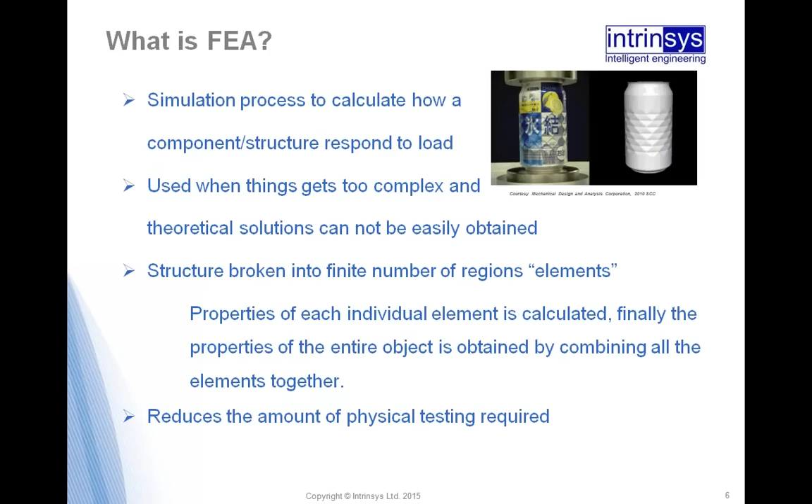So really the major application is that it allows you to reduce the amount of physical testing. It doesn't mean that you cut physical testing 100%. It always comes as a complement and allows you to reduce the amount of it, because it's always good to use physical testing to validate FEA.

In terms of what it gets used for, almost any engineering application finds application for FEA, whether it's transportation, mobility, aerospace, marine, industrial equipment, high-tech, consumer, life sciences, which is really a very interesting application which has come up quite a lot in the last few years. We find that a lot of high technology these days is being developed to look at life sciences. There's so much application for modeling, for example, human parts. There's a lot of development in being able to model human tissue materials and so on. So that's quite interesting, and the future is quite bright in there. Energy applications, architecture engineering, and many, many other applications.

What can it tell me, or what can it tell people? It usually answers many questions. A typical question: how can I improve my design? Will my product leak? Will it break if I drop it from certain heights? How long will my product last? How will it perform if it's used off-spec? All these questions can be answered easily by FEA. How can I make my product lighter? Is my product safe? Will my product pass or require certification testing? If I make my product from cheaper material, will it still work?

Okay. So just so we can summarize what sort of advantage FEA can offer us, it's cost effective. As you can imagine, physical testing is getting very expensive, especially if you have to do many different iterations. So there's no need to create the real thing and destroy stuff and so on. Time saving. Again, once you've created a simulation, you'll be able to change the parameters very easily without having to go to the factory and redo prototypes and stuff like that. So a lot of time saving in it.

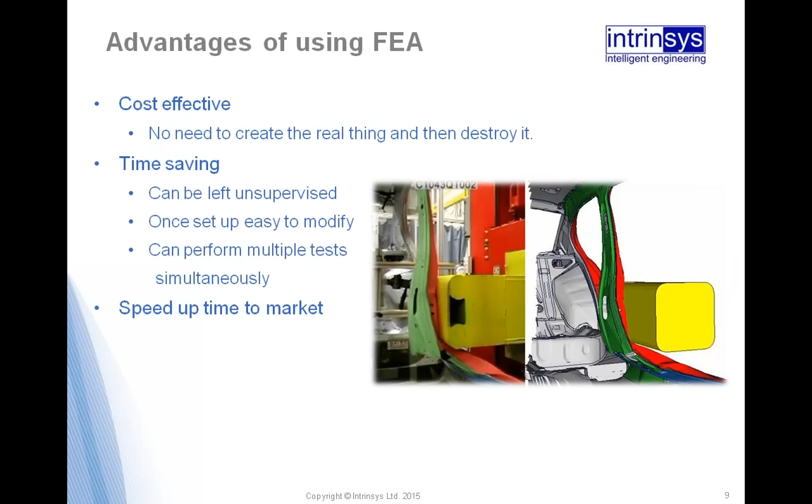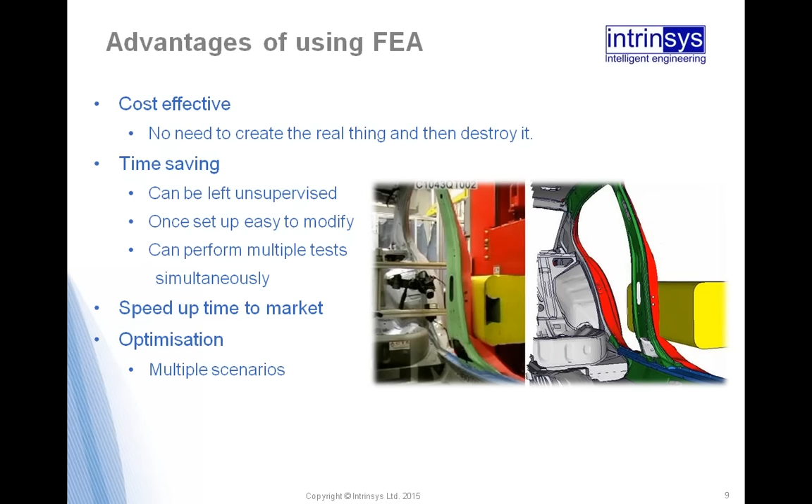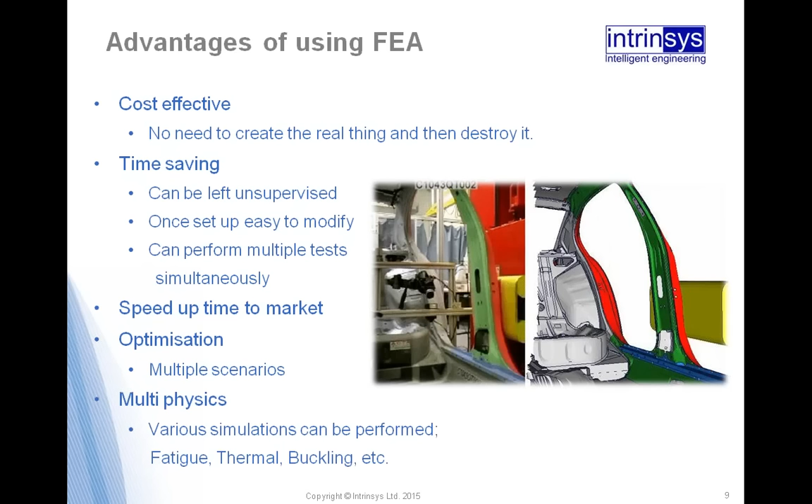Speed up time to market. So again, once you've done that, you'll be able to get the product to the market quicker. Optimization, very easily done by changing parameters within the simulation process. Then you can get the answer quicker. Multiphysics: if you're doing advanced analysis, you'll be able to couple different types of analysis behaviors, such as thermal and stress, or thermal and CFD, and so on, fatigue analysis, all that kind of things that you could do with multiphysics.

So in terms of what is so special about CATIA for FEA analysis, the strongest part basically is that it's integrated with CATIA. You find this is really, really useful, because it's using the same user interface that you used for the design environment, okay? And all the analysis specifications are associated with the design. So any changes get maintained in there. You don't need to come out of the software. And basically, you can properly size the design, add material only when you need it.

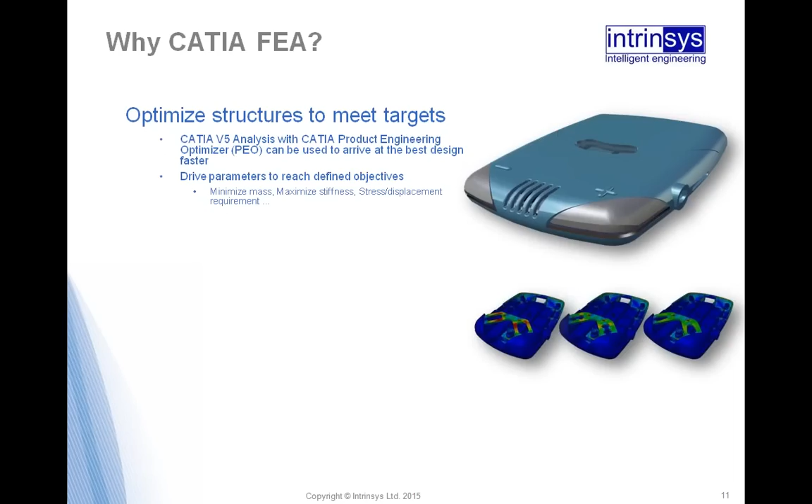If you want to compare design alternatives, for example, if you have a number of parameters that you'd like to test, rather than go to the factory and create prototypes, you can actually parameterize your model, such as geometry parameters, whether it's length or diameter or width and so on, or material properties that you'd like to change in order to get the best one, or change the mesh parameters or loading parameters. All these things can be parameterized. You can also optimize the structure using the product engineering optimizer. With this one, you'll be able, for example, to minimize mass or maximize stiffness, or control how stress and displacement behave.

This is a very interesting one, which is basically the workflow for designers. It allows you to use templates. And these templates can be customized by, for example, senior designers for junior designers to be used later on. So they could create templates to control mesh properties, or connections or load constraints, or even reports. When you generate reports, you could set up certain templates to generate reports, and in the future the junior designer just comes and uses these templates for his project.

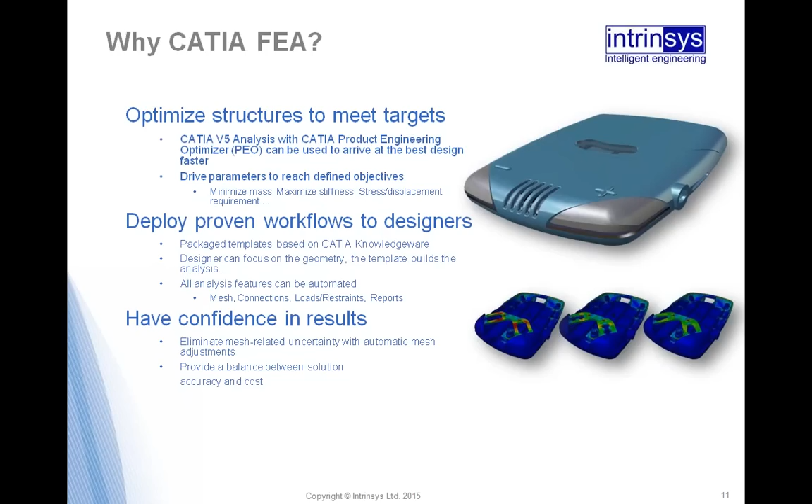And the final one, basically, is to get confidence in the results. Because there are so many automated tools, such as automating the mesh, it allows you to get the software to do all the hard work in order to work out, for example, the best balance between solution accuracy and cost.

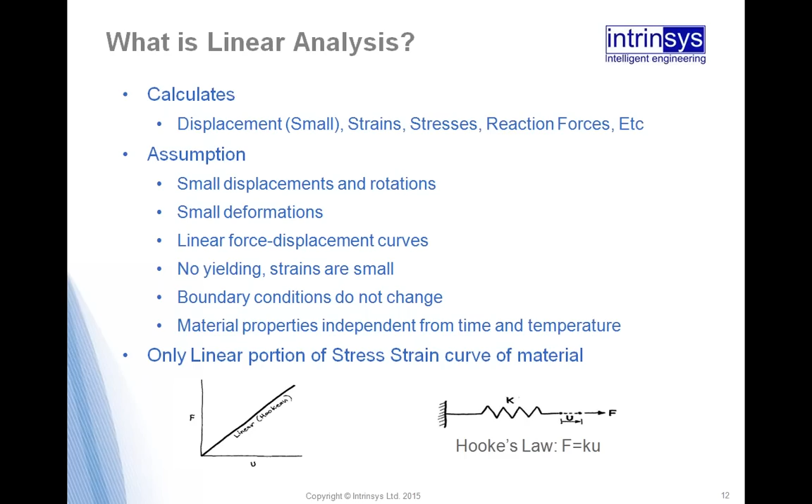The other thing is we basically assume that the material deforms linearly, so the relationship between the stress and the strain is proportional. Therefore, a linear analysis displays a stress value. If a linear analysis displays a stress value beyond the material's yield stress, we generally assume that yielding would have occurred and that the deformation at this point would be inaccurate. So you can see it's also heavily associated with Hooke's law.

So analysis tools for linear analysis - what solutions are there for CATIA V5 users? We're going to keep coming back to this diagram. You can see along the top we've basically got designer, design engineer, and analysis expert. We're going to start off by just focusing on the designer part of this diagram, which is just the CATIA V5 analysis tool. So we're looking at the designer being able to perform linear static analysis and mode-based dynamic analysis.

We're not saying that analysis experts wouldn't be performing these analyses, it would just be the designer. We're just saying the designer wouldn't be creating something like a transient dynamic load analysis, etc. They'll be sticking to linear static analysis that they can perform, and again, this can be done using CATIA V5.

So in CATIA V5 linear analysis, it can be performed using parts and assembly analysis. Whether you have a part or an assembly, you can create a linear static analysis of it inside CATIA V5. Within CATIA V5, you need the GPS module to create a part structural analysis and a GAS module to create an assembly structural analysis, but these are all part of a GAE configuration.

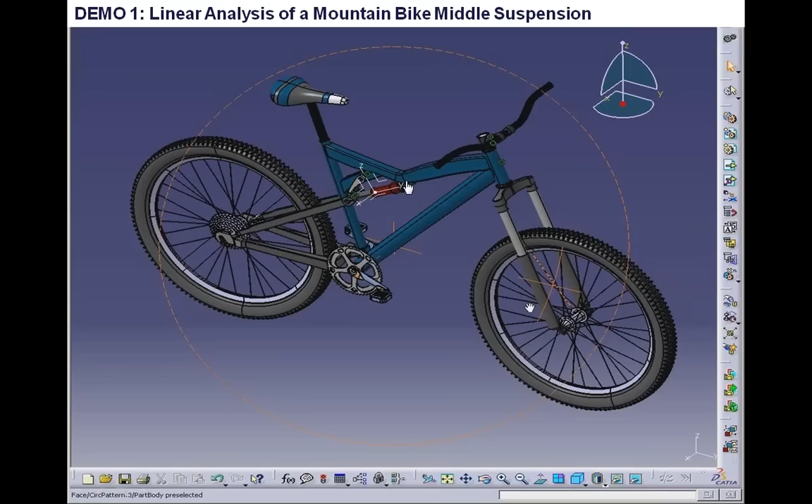The components we're actually analysing are the frame, the shock absorber, and the bracket which attaches the rear of the shock absorber to the frame. We're interested in the join from the top part of the shock absorber to the frame. That bracket would have been welded onto the frame itself, so we're trying to analyse that.

So I've just talked you through this analysis. As you can see, it's just a mountain bike.

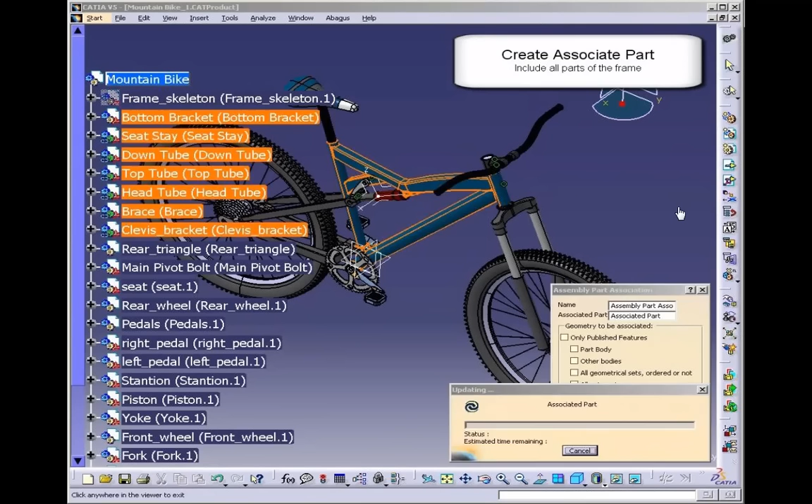We've got an assembly, and the first thing we're going to do is the frame itself, which is made up of multiple parts - each part of the frame in this assembly is an individual part. But just to make it simple in our analysis, we're going to create an associative assembly part, so each item in the frame is seen as one part. Rather than have the top part of the frame, the left part, the right part, etc., we're just creating the frame as one part. So again, you can see the associated part.

Now what we'll do is assemble it all into one part body. This is a must in CATIA - it all has to be under a part body. So we've just created a Boolean operation.

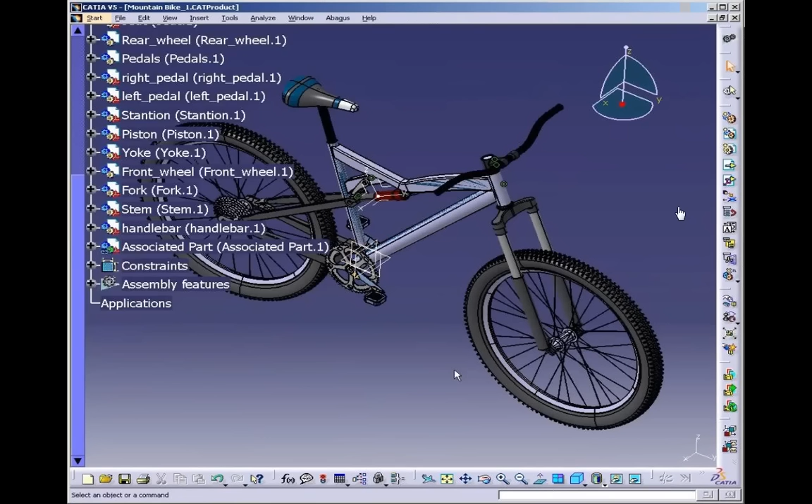And then we're now going to apply a material. We can apply a material at the part level or within the assembly, but in this instance, if we create the material to the part at the part level, that will automatically be ported over into the analysis when we move into it. The next thing we want to do is hide components of the mountain bike that we're not interested in.

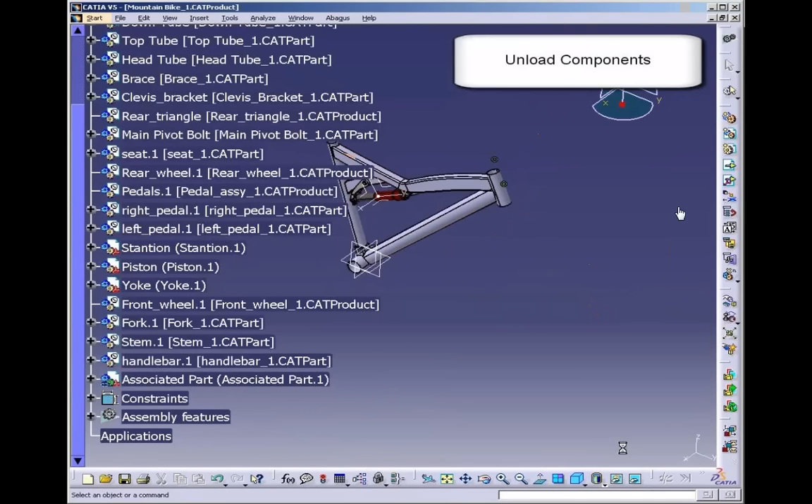There's no point overcrowding your analysis, making it longer to set up and longer to compute. You basically just want to eliminate anything that doesn't need to be in your analysis, or that you could use something called virtual parts to replicate. So these are the four components I'm basically interested in for the analysis.

So I'll just move into the analysis workbench and create the analysis. Once it's let me into the workbench, there we go - I'm going to create a static analysis, a linear analysis, and you can see it's automatically created my mesh.

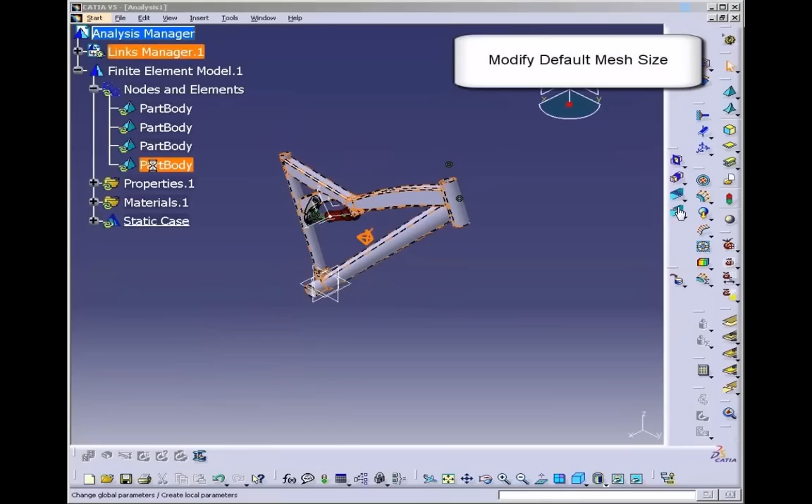So there's four meshes because there's four individual parts, and I can just modify the mesh size by double clicking on the meshes.

Okay, then I can restrain my model. I'm restraining the frame, so towards the front of the frame where the handlebars would go, and the rear of the frame where the seat post would go. In this instance, I'm creating sliding constraints.

And then because we have four parts, even though we've got four meshes, CATIA doesn't really know how they interact with one another, or that they interact at all. So we need to tell CATIA that they're actually connected - this is what we're doing now, creating connections between parts.

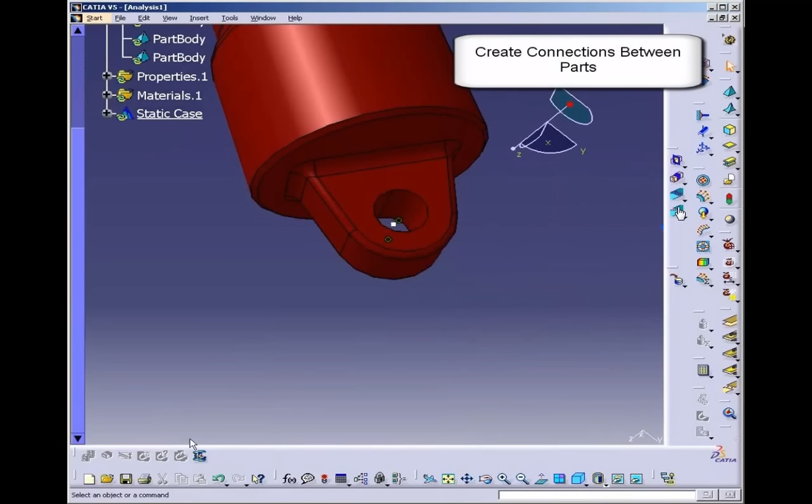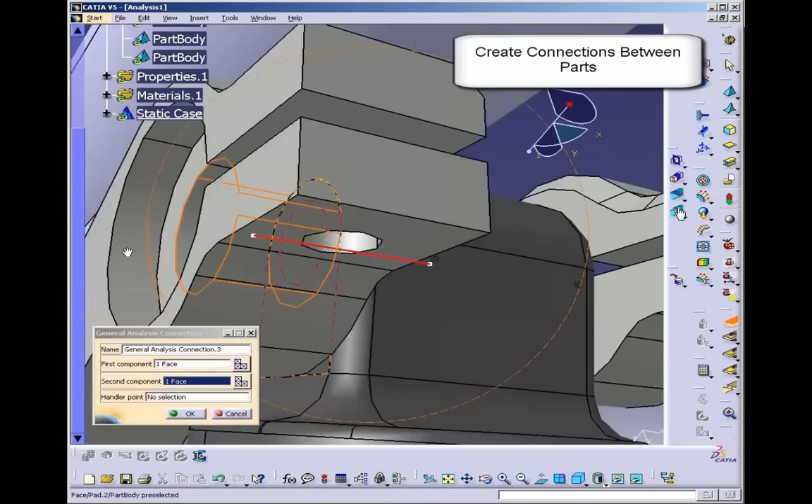So by picking the appropriate topology, in this case between the bracket we want to analyze and the top part of the shock, we create a connection. Another connection is between the second bracket and the frame. You have to take care when selecting the right topology. Then we have the lower part of the shock and the bottom part of the bracket. And finally, the fourth connection is between the top part of the shock and the bottom part of the shock. So there we go.

So now we've told CATIA everything's basically connected, but we haven't actually told it how it's connected. We've said there's a connection, but we haven't got round to telling it what type of connection it is. So this is where we basically create a connection property.

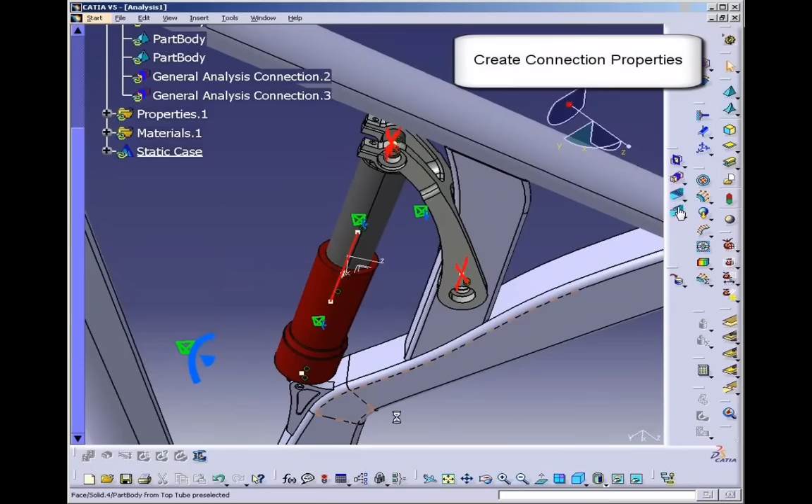So all I'm doing is saying at the pivot points that there's a rigid connection, but it's allowed to rotate about its own axis. That's what I'm doing in the three instances - there we go, so I'm allowing rotations.

And then on the final one, I'm basically creating a fastened spring connection. I'm allowing it to translate, so dampen along its own axis, but making it infinitely stiff in the other directions so it can't translate in those directions - so it's basically acting as a damper would, translating along its own axis.

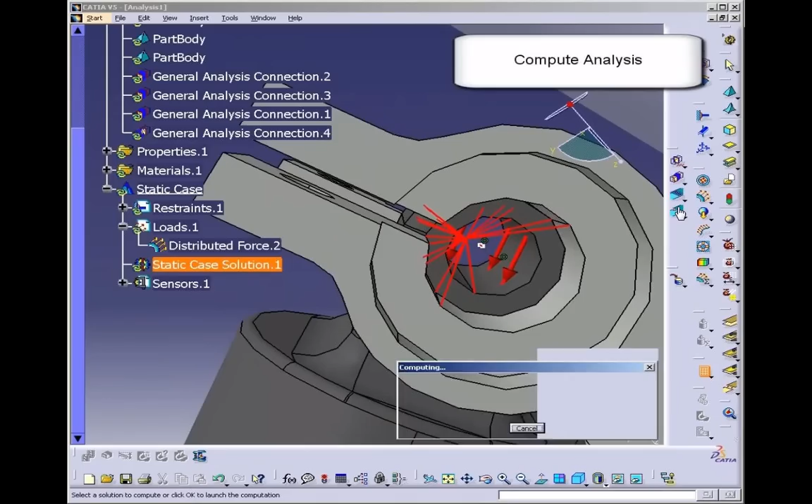The next thing I'm going to do is simulate a force as if there's basically an impact on the rear wheel and the shock's absorbing the impact. So I've just applied a force on the bottom end of the shock. Now I've basically got all my mesh, my properties, my materials from the parts itself, and my loads and restraints, etc. So I'm ready to compute - I'm computing my analysis now.

The linear analysis is fairly quick, so it won't take that long to compute. There we go. So there's my analysis results.

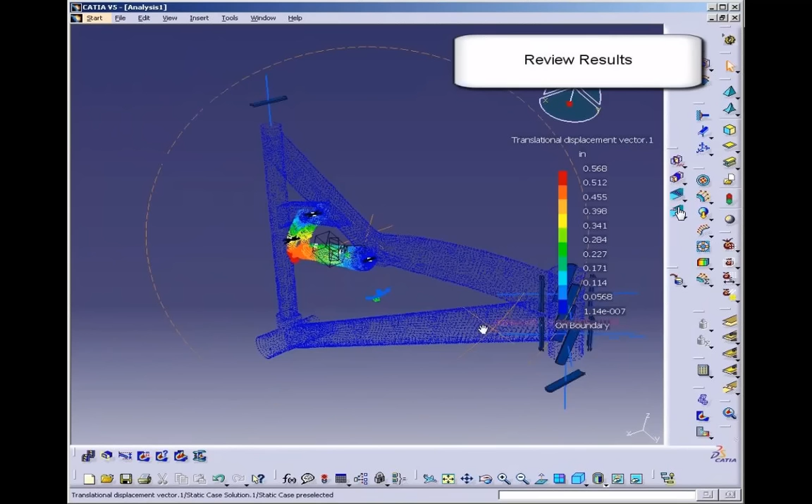It appears that nothing's really happened, but what we need to do now is tell CATIA what result do we want to see. In this case, I've selected a displacement. I'm going to change how that displacement looks, so I can change the render style essentially.

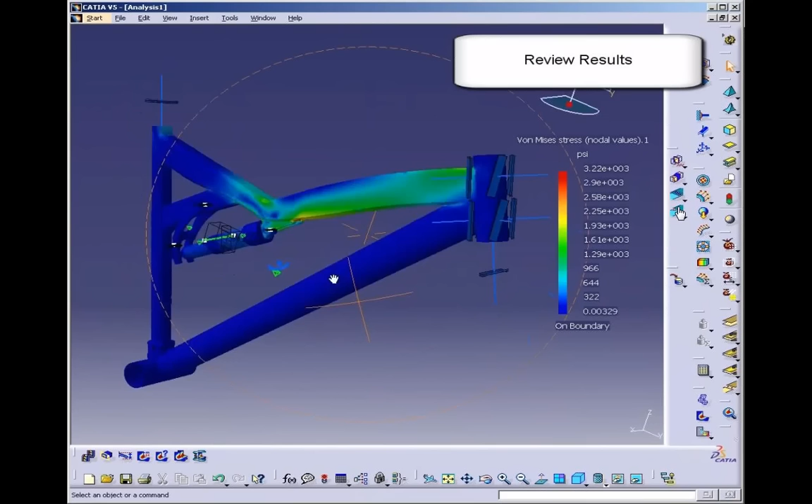And there we go, this is showing my displacement. I can then animate the analysis so you can see the deformation. Again, this isn't time-based. It sees deformation at zero and then maximum deformation. You just tell it how many steps you want to see in between, so it appears to animate, but it's not actually time-based.

Now what we're going to do is create a measurement. CATIA basically calls a measurement a sensor, and we're going to create a reaction sensor at the top bracket, where the top part of the shock meets the frame.

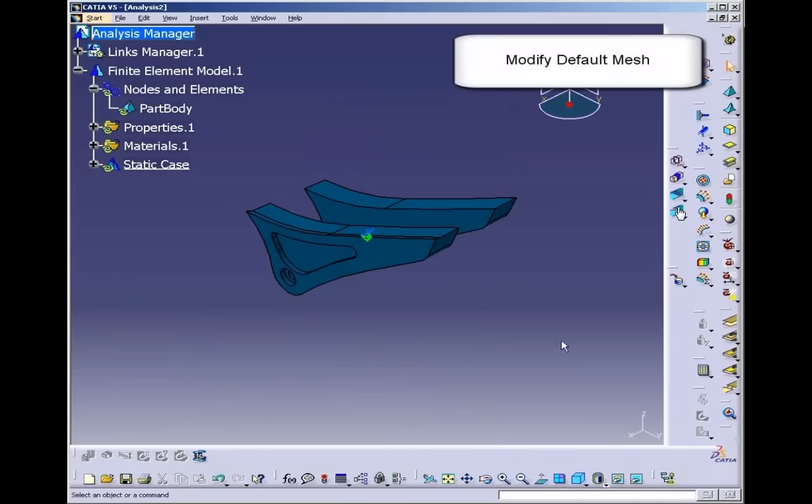And then we're going to actually create a secondary linear analysis where we isolate that top bracket itself, bringing it into another analysis, changing the mesh size, and restraining it—clamping the top because it's fixed, or it'll be welded onto the frame. So essentially we're just assuming it's fixed on.

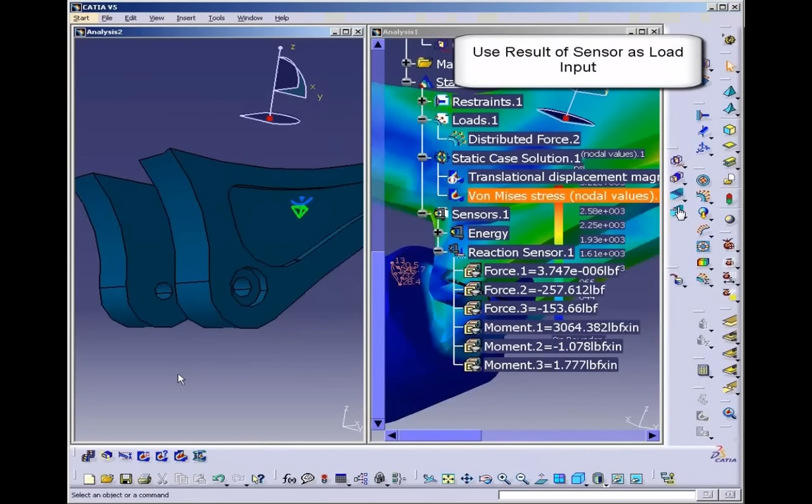And then we're going to take the measurement from our reaction sensor and actually input it into our secondary analysis as a force. So there's the results from our reaction sensor—the components in the force in X, Y, Z, and then the moment around X, Y, and Z.

And then we're going to create a bearing load on that, where there will be a bolt between the top part of the shock and that bracket. And we're essentially going to input those reactions.

Now if we compute that analysis, we'll just run the computation. Okay, and now we can review the results, so we can see basically the stresses within that lug. Let's animate it—we've taken the results from one analysis and basically fed it into a secondary analysis.

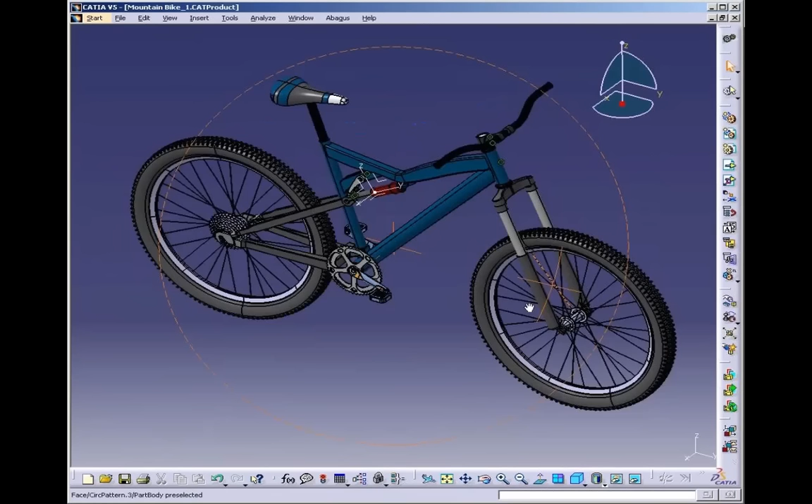So as we saw, there's a range of tools to create forces, constraints, etc. in our linear model in CATIA V5, so linear analysis. But what we didn't really get to see is that all we did was just change the mesh size. So does that mean we don't really have much control over the mesh? That isn't actually true—there are additional tools available for the user within the linear analysis to actually gain more control over the mesh.

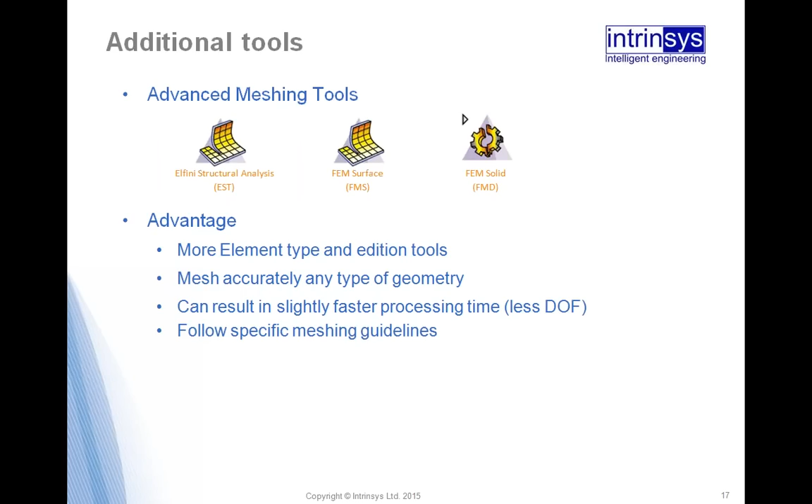These may require additional add-ons such as Elfini structural analysis, FEM surface, FEM solid, and that will give the user more element types to play with. We saw we had tetrahedral elements—now we can have quad elements in our models. We basically have greater flexibility with modifying the mesh. And again, if we can reduce the degrees of freedom, it results in a lower computation time. So that's basically our aim.

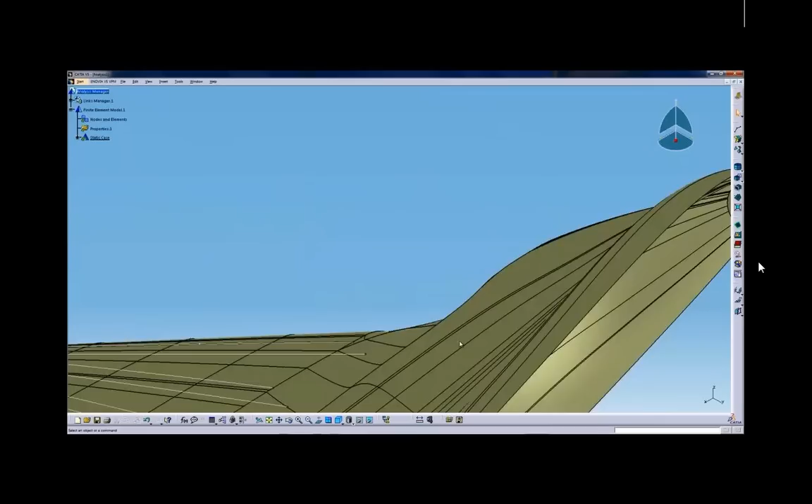In this demonstration, I've got another one—this is basically an aircraft surface model. Because it's symmetrical about the center axis, I've basically taken half of the model. There's no point using more than you actually need—if it's symmetrical, only use half of it, if there's two symmetry planes, use a quarter of it, so on. So we're always trying to reduce the computation time.

So what this will basically demonstrate is using advanced meshing tools. This is available as another workbench—if you have the Elfini add-on, for example, it will give you access to this workbench. And we're going to have a look at matching mesh seeds.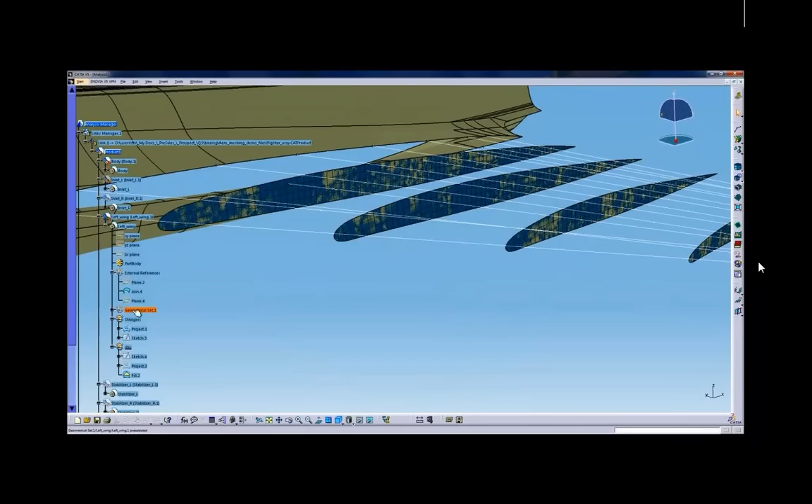In this instance, we're going to first of all mesh the wing ribs—that's the first item we're meshing. You can see the seeding on there. Just run the mesher, and you can see the mesh on the wing ribs. At this current stage, it doesn't really mean much to us—we're not really focusing on the size of the element, because we haven't got any meshes to match against.

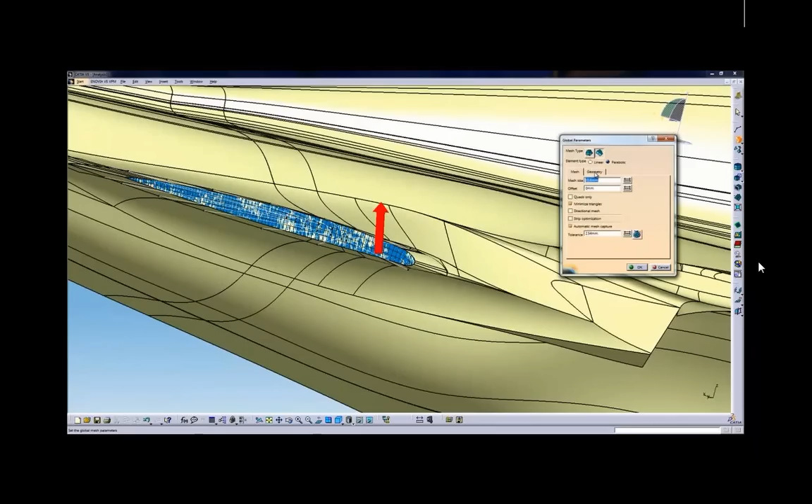So now in this instance, what we'll do is go and mesh the aerofoil surface, but don't forget we need the elements to line up with the ribs. The reason we want to do that is we want to reduce the number of nodes we have in our model. So if we can share nodes between elements, then we can go ahead and do that.

So what we're doing in this instance, meshing the top surface of the aerofoil, we're basically telling it to match the seeding—so it matches the wing ribs and also matches the spar. So now when we run the mesh, just compute it.

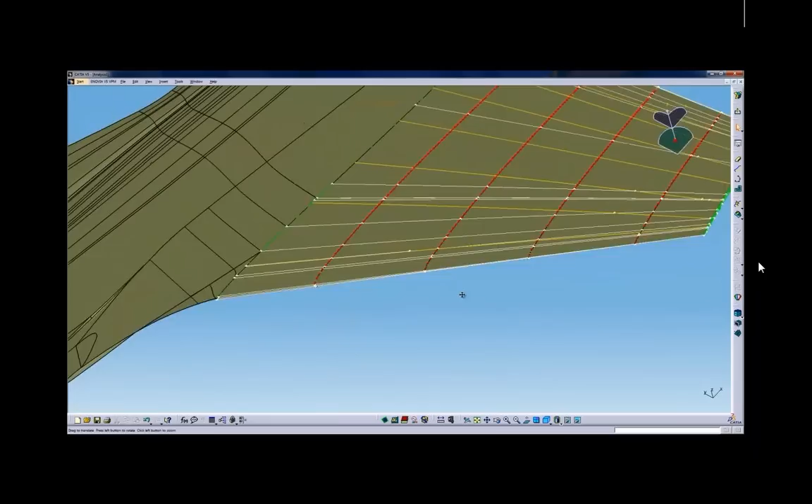So there we go. So since we selected the wing spars as well, you can see that the seeding also creates a point where the intersection is as well. Take a sec to run that, and there we go. So now we've got the mesh on the actual aerofoil surface, and you can see it's actually sharing nodes, so you can see that the elements all meet up at a common node. Okay.

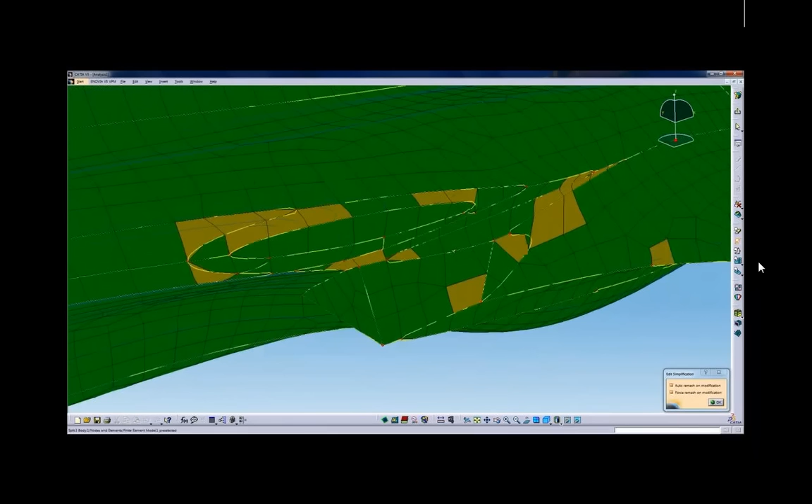What we can also do with the advanced meshing tool, so if we've already created a mesh and we're not really that happy with it, we can actually modify the mesh as well by hand. So you can see in this instance, I can pick a node and just remove nodes, manually manipulate nodes along the surface of the actual aircraft surface.

So you can see if there's any areas I don't like, or if I want to refine, I can refine it. So all I'm doing in this case is splitting up a certain area, and then I'm going to refine the mesh within that boundary. So it gives you a lot of control over your mesh itself. And it updates all the elements around it, so the seeding matches at that boundary as well. Okay.

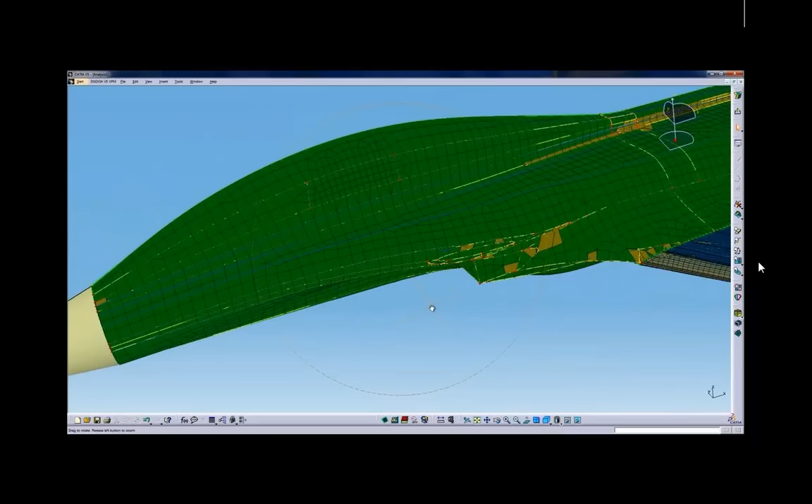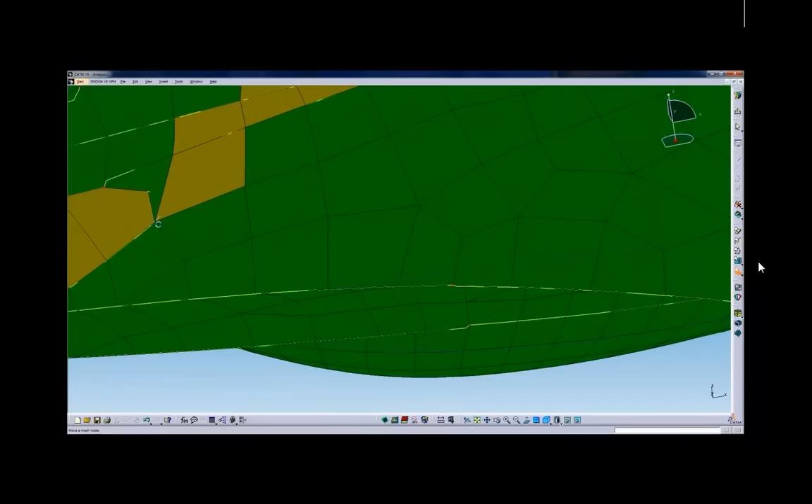So you can see we don't really have to do much to get CATIA to do what we want as well. We just tell it and it does it. Again, we can simplify meshes. So you can see in this instance, there's a node I don't like, so I can just drag it. If I just want to manually move a node, I can do that. And it just updates the mesh around it for us. So the best thing about CATIA is it's pretty difficult to get a mesh that won't work, essentially.

And there we go. If we speed it up a little bit, let's assume that that symmetrical part of the aircraft is now meshed. What we can then do, we can basically take a symmetry of that mesh just to replicate the entire aircraft. So if it doesn't have symmetrical loading on it, but the geometry itself is symmetrical about a plane, we can just create the mesh on one half, which is what we've done, and then create a symmetry of that mesh about a symmetry plane. And then we can apply our asymmetric loading if we wanted to.

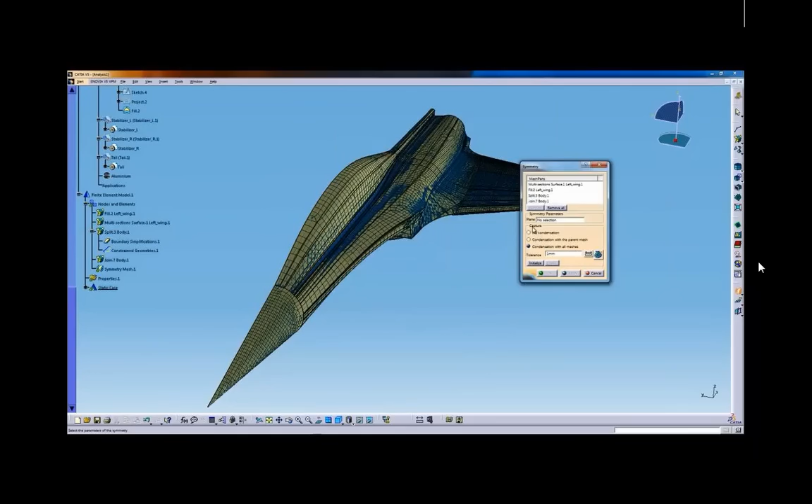Again, if you had symmetrical loading, then you might as well just create the correct boundary conditions at the symmetry plane. So the aim of the game is to reduce computation time. Okay, so if we just apply that, there you go, we can see the other side of the aircraft. So we want to try and reduce the amount of work we're doing as well.

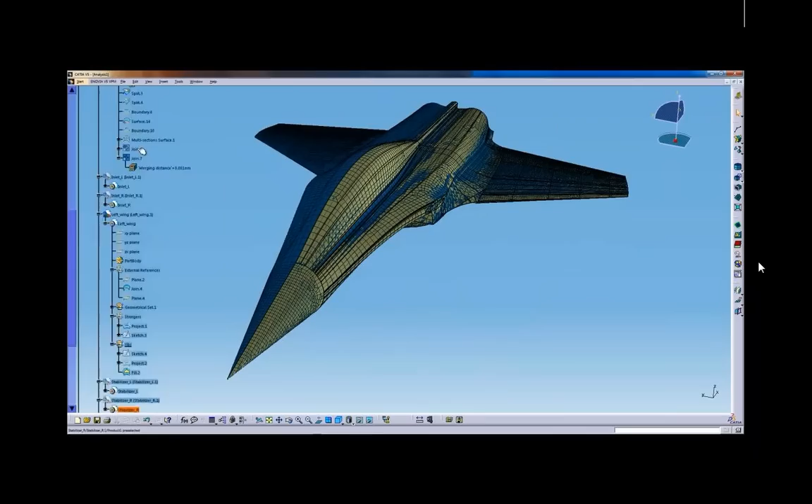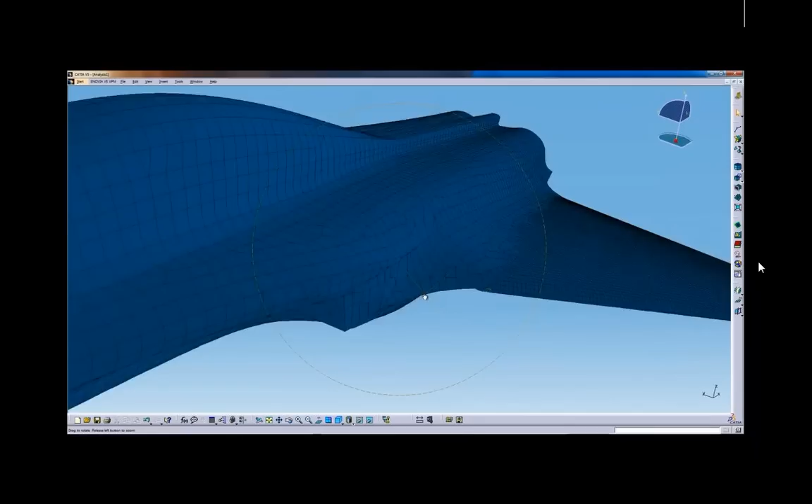And then the other thing we can do, we can add a clipping plane. So if we wanted to, we can basically clip through our model. We can drag a plane through our mesh. So if we just do that, there we go. And then we can run through our model and see the elements inside. So it's pretty difficult to see if the mesh seeding of the ribs actually lined up with the top of the aerofoil, so you can actually see that in this view because we've clipped it. Okay, so that's basically the advanced meshing tool in a nutshell.

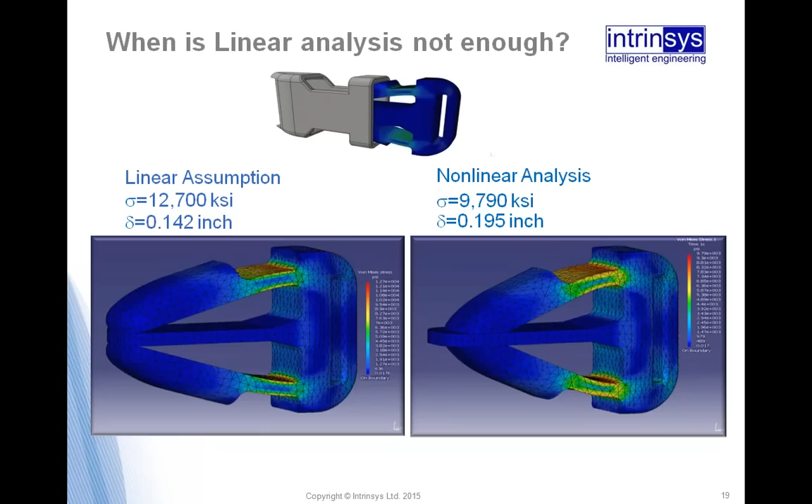So for example, with the linear assumption, once the prong of a clip makes contact with the center, that is it, that will give you a result. But nonlinear analysis will take into account contact and then sliding. So it's taking into account contact with the center of the part and then sliding along it.

So perhaps this is a good time to see how many of you have actually created a nonlinear analysis before. So if we just run our poll again. So you'll just see a poll that will come up on your screens.

Okay. It seems like a majority of you have never performed a nonlinear analysis before. Okay. Yeah. Hopefully this will be quite exciting.

Okay, so analysis tools for nonlinear analysis. So again, we're still looking at CATIA V5 itself. As I mentioned, we're referring back to this diagram. We're now moving away from designer and moving to design engineer. So it's still intended for designers, but we're moving towards a scale for design engineer. Analysis experts can still perform nonlinear analysis, that's what they do, but we're just moving towards the upper end of the scale.

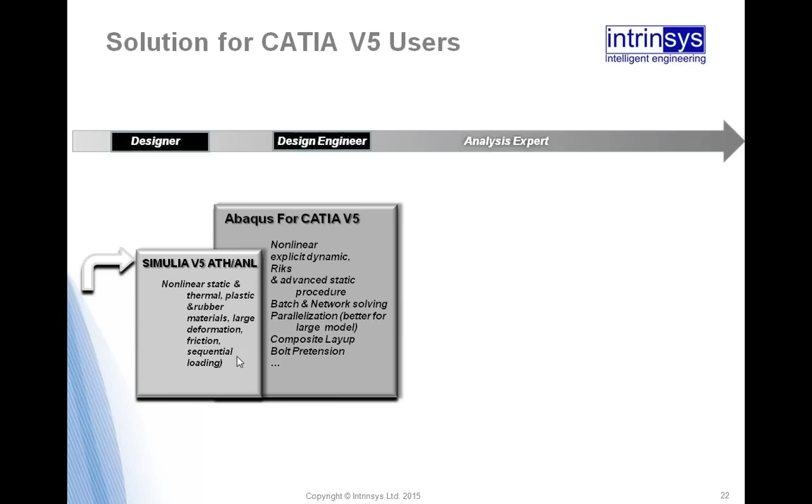What this means is we're now moving from CATIA V5, we're now taking components from Simulia V5, so ATH, which is basically a thermal solver, ANL, nonlinear solver, and we're still using the CATIA V5 interface, but it gives us the ability to create nonlinear static analysis, thermal analysis, analysis using rubber materials, large deformations, etc. Okay. So we're not focusing on Abaqus for CATIA yet, we'll come on to that in a second.

So what exactly is nonlinear analysis? It's actually everyday situations. Everyday situations are actually nonlinear, without us even thinking about it. One of them would be coil spring compression. When we go over a bump in our car, for example, and our coil spring compresses, that's a nonlinear situation. Flexing of a paper clip back and forth, we'll come back to that in a second. Crushing an aluminium can so that it buckles. Once you crush it, it doesn't act elastically and spring back to its original shape. It generally buckles and stays at its new shape. So that's a nonlinear analysis.

And hitting a pothole in the road as well. We don't actually recognise it, but if we drive over a pothole in the car, our wheels actually exert quite large deformations. But it happens in such a short period of time, and it's basically acting elastic, so it springs back to its current shape. But again, that's a nonlinear case.

But going back to the paperclip, if we move the paperclip with large deformations, let's say we apply that deformation about 7-8 times, eventually it will experience fatigue and then it will fail. So these are all nonlinear cases. You don't ever expect to flex it back and forth infinitely and have it always just spring back to its original position, which is what the linear analysis would assume.

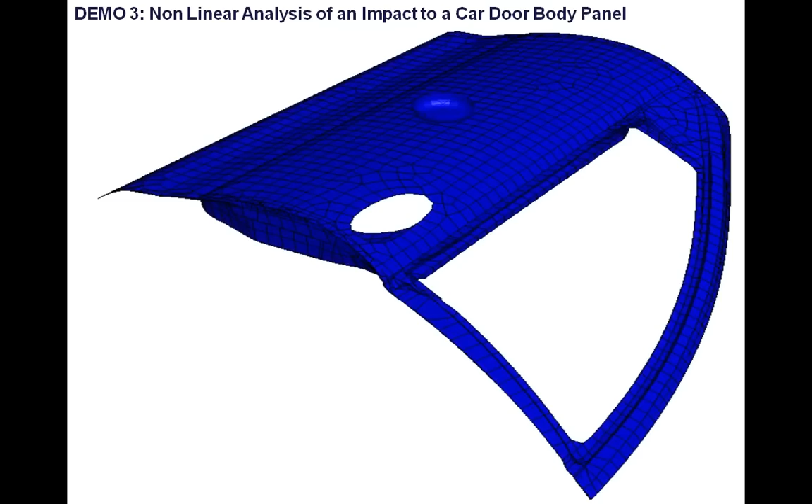So here we have another demonstration. It's quite a short demonstration. It's a projectile hitting the door skin of a door, essentially. And this is going to be a nonlinear case, and it's time-based. So even though it looks like an animation, it's basically a time-based analysis, so you'll see the results with respect to time.

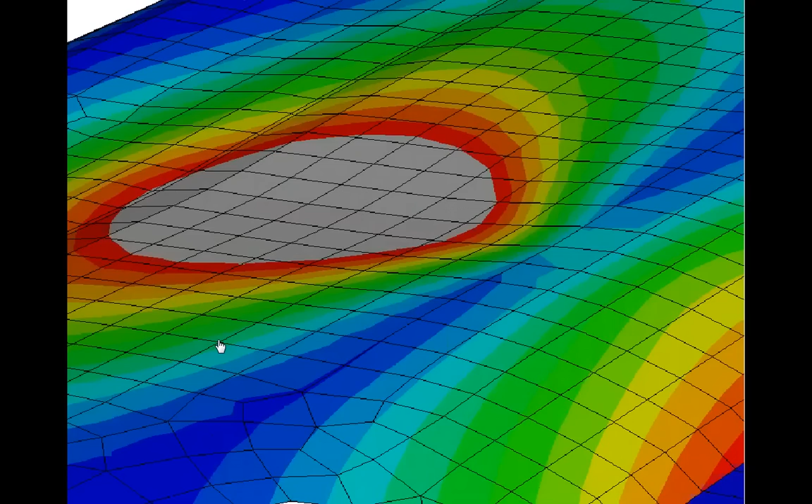So you can see in this instance, as soon as it hits the door skin, stress basically dissipates and then is transferred back to that projectile before rebounding. Okay, so that was over time. You can see how the stress changes a lot on that skin.

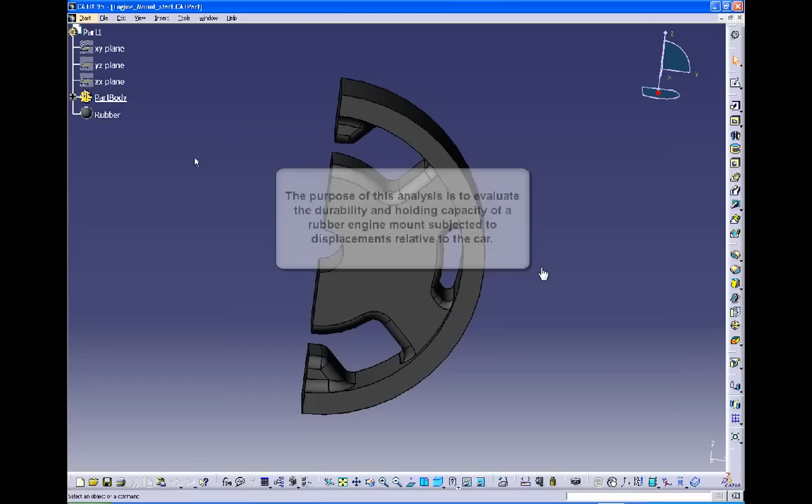Okay, here we've got another example. This is basically a rubber engine mount. Because it's a hyperelastic material, we need to create a nonlinear analysis. Perfectly elastic materials we'd assume would deform linearly, so the stress and the deformation will be proportional, but this is rubber, so this isn't true. So we'll start off by creating a nonlinear analysis using an ANL component.

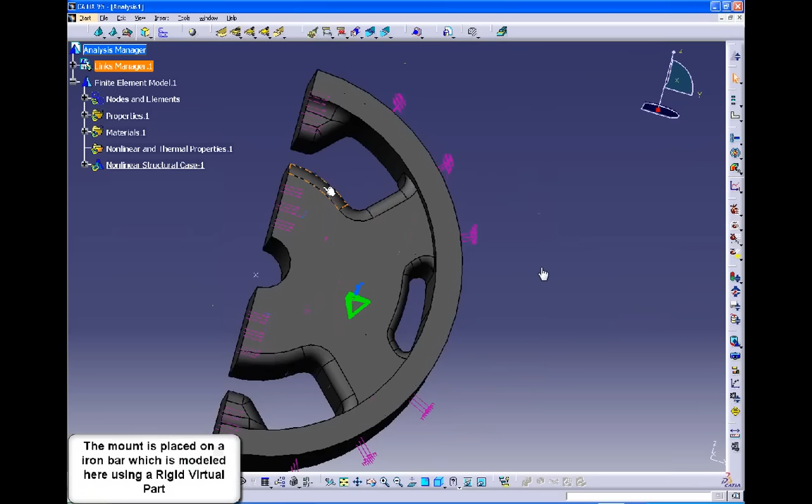Again, to simplify the model, because the engine mount has two symmetry planes, we're actually using a quarter of the entire part. So we're going to simulate the symmetry planes by adding no displacements along the y-axis and the x-axis. We're using displacement boundary conditions and saying no displacements in x and y on the corresponding faces. We're clamping the outer face because it will be fixed within a metal housing.

And then at the center, what we normally have is a metal rod which is fixed to the engine that will fit through the center of this part. So we're simulating that using a virtual part. We're assuming that this metal rod will flex in the z-axis, so it will translate in the z-axis. So we're going to enforce the displacement on our virtual part.

And then we're going to view what result, or how that impacts our engine mount. The next thing is, because this experiences quite large deformations, it's very likely that it's going to come into contact with itself. So we do have to be a bit intelligent here. We do have to sort of understand, well, if it was to deform, how would it deform? And then where may it come into contact with itself?

So we've selected the faces that we're assuming are going to come into contact with itself. You wouldn't go and pick everything because it will take way too long to analyze and it just wouldn't work. And then we're telling it what type of contact we're expecting. So we're saying there's a contact pair, basically self-contact, because it's just one part. Just define the mesh, so you're just going to modify the mesh size.

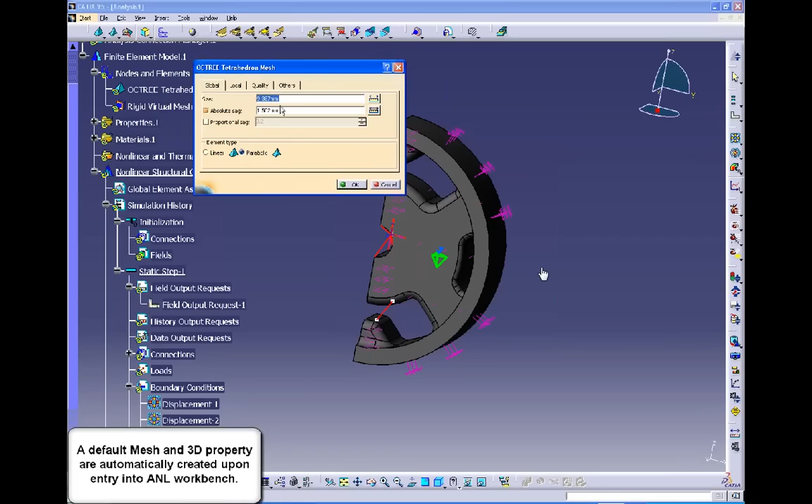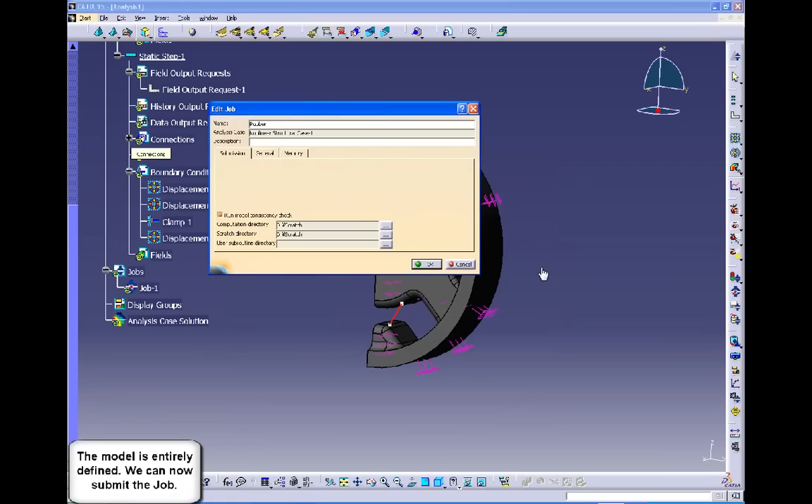Okay, and then we're just going to set up a job. So with an ANL option, we basically have more tools in order for us to set up jobs. The reason for that is because we can run multiple jobs simultaneously. We can set up jobs and just leave them all running overnight, for example. So we just have more tools. Okay, so here's my job manager, and I'm just going to submit the job. So you can already see, rather than just run one job at a time, this is giving us more options.

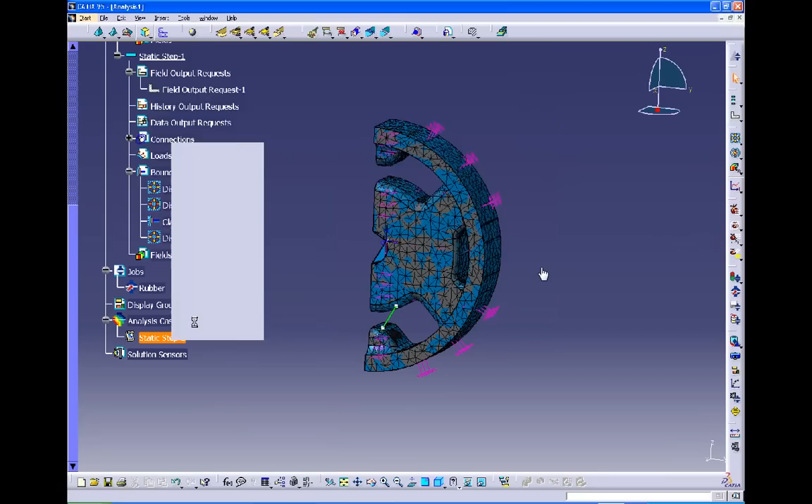And the other thing we're doing, we're actually replicating the displacement more like real life by applying the displacement in increments, so non-linearly. We're not assuming that the displacement's applied in one go, we're saying that it's applied in time steps. And there we go, there's our results, so we can see the translations with respect to time.

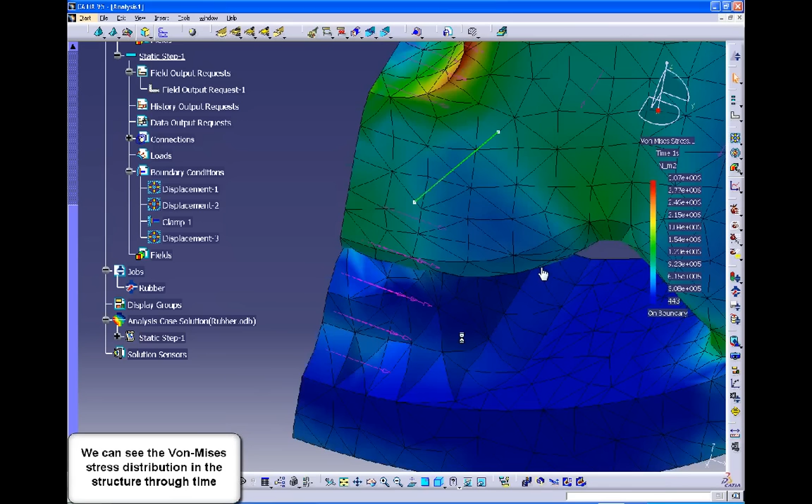What we can also do at this stage is change, so we're looking at the translation result, which CATIA calls an image. We can change our image generation, for example, to show maybe the contact pressure. So that's what we're seeing at this stage. It's isolated all the other geometry automatically to display the contact pressure. Now we're seeing the von Mises stress. So again, non-linear analysis, this shows it with respect to time. You can see when it comes into contact with the bottom part, how the stress is transferred.

Okay, so we're now again moving up the scale. We've moved away from designer, we're primarily focused on design engineer, moving towards expert analyst, and we're going to have a look at Abaqus for CATIA. So again, we're still using the CATIA V5 interface. It's still familiar to any design engineer who creates models in CATIA. But we've basically got more capabilities than the ANL and ATH from SIMULIA V5. So now we have nonlinear explicit dynamic capabilities, network solving, so we could take into account cores from other machines to decrease our computation time, composite layups, bolt pretensions, etc.

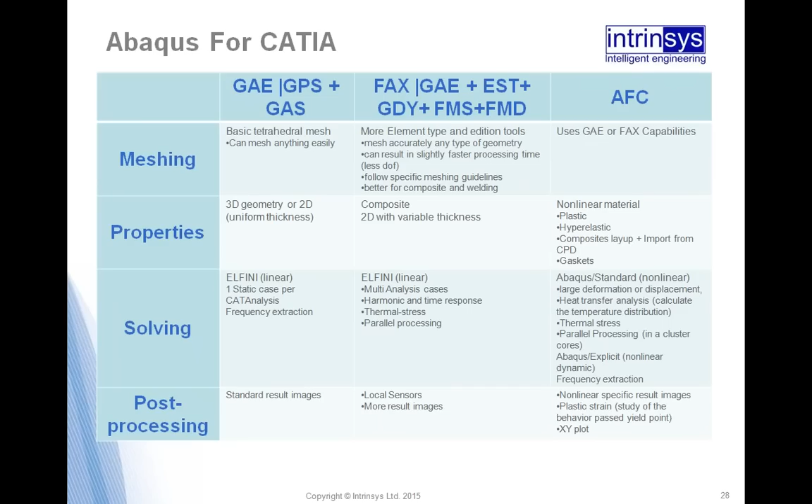Solving, so we've now got heat transfer analysis, thermal stress. Where with the GAE we only had one static case per CATIA analysis file, so we could only run one job at a time, with the FAX we could run multiple analysis cases. We could still do thermal stress and parallel processing, but with Abaqus for CATIA, we can now do network-based solving, so we can send out to multiple cores, etc. Again, with post-processing, we now have non-linear specific result images, plastic strains, etc. So you can see AFC actually gives us a lot more capability.

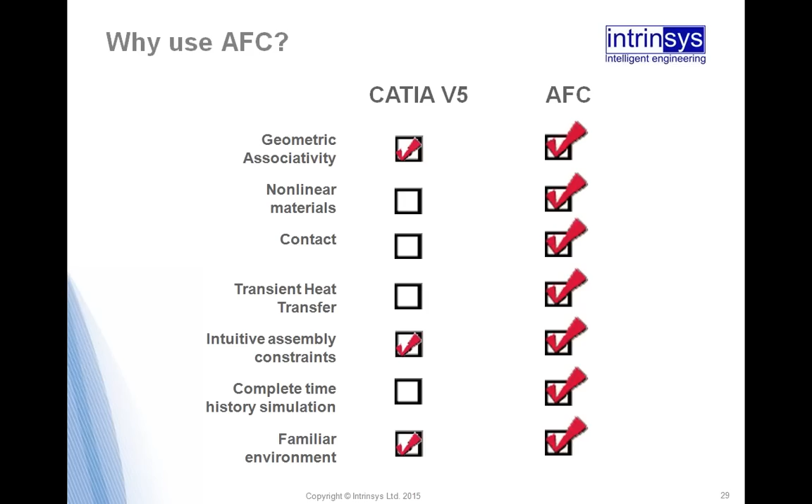But on Abaqus for CATIA, we've still got that same familiar environment. We've still got the intuitive assembly constraints, still got geometric associativity, but now we've got a large catalogue of nonlinear materials. We've got contact, transient heat transfer, complete time history simulation, and so on.

So in this demonstration, I basically want to show you guys Abaqus for CATIA using time-based sensors. Okay, so it's basically an impeller blade. The job's already been computed, so we're basically viewing the von Mises stress. We're looking at the results.

Okay. We're basically going to create an Abaqus sensor for displacement. So we'll just show the geometric model. Okay, there we go. We've just hidden the result, so we can just see the geometry itself. And we're basically going to measure a displacement at one point. So on one of the blades,

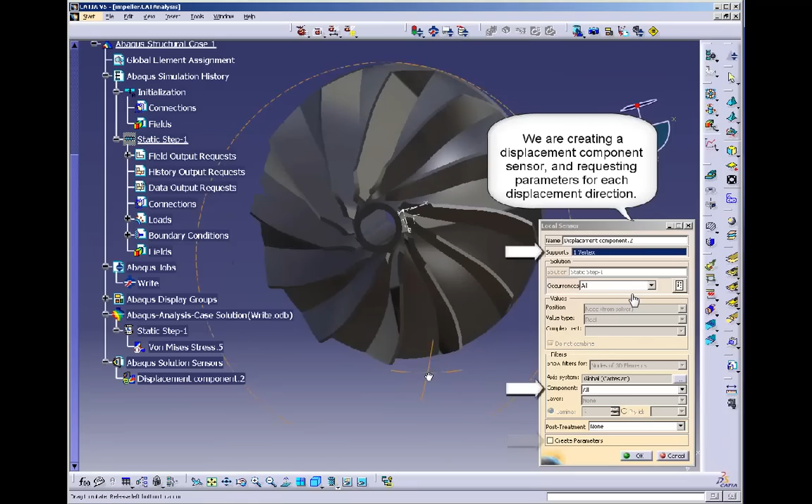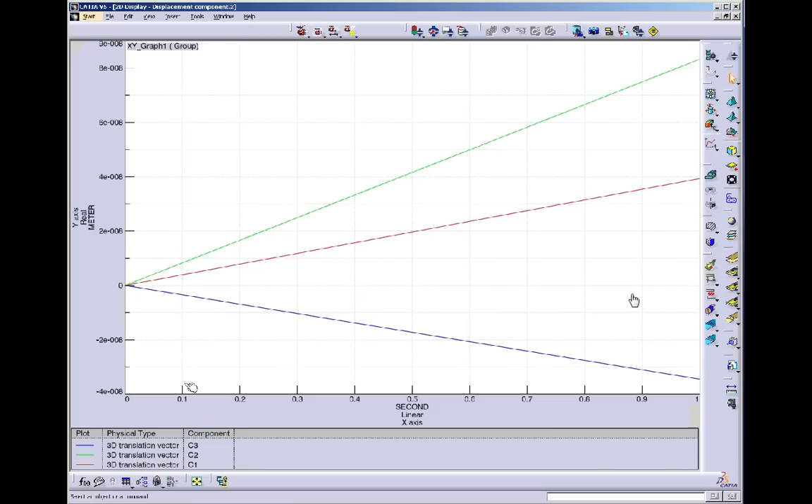there we go. We're going to select a point, and we're going to tell CATIA to measure the displacement in all its components. Okay. So as I mentioned, sensors are basically measurements. Because we created a sensor, we just need to tell CATIA to update, so it just reads the values. And again, it's plotting, in this case, the X deformation over time.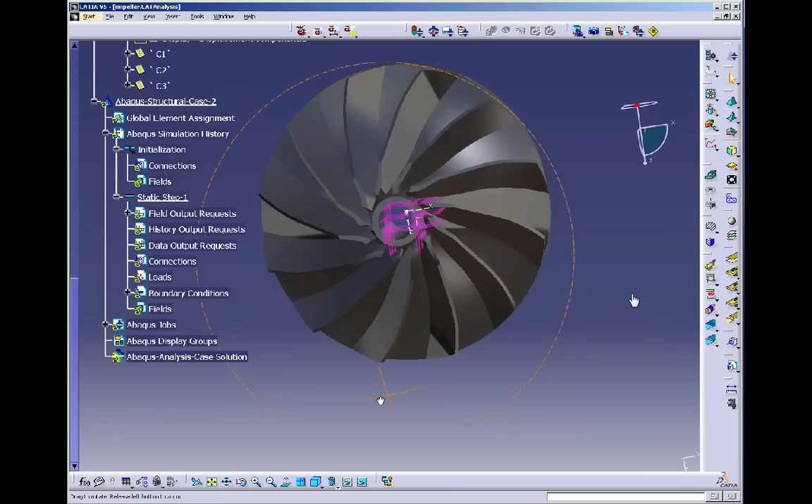Okay, so now we're going to actually add a secondary analysis into our analysis, so a secondary case. You can see it says Abaqus structural case 2. And because it still has the same boundary conditions, we're just going to copy and paste the boundary conditions. So it's basically clamped at the center. Rather than having to define everything again, you can just copy and paste any applicable loads, etc.

But what we're now going to do, we're going to create in our new case the enforced displacement, which we've taken as a result from our first analysis. Okay. So we're creating a displacement at the bottom and at the top of that blade. And because a nonlinear analysis is time-based, we're going to take an increment. So we're basically telling it at what increment to set the displacement from.

Okay, so we're setting this up as a parameter. We're not manually inputting values. We can get CATIA to do all the hard work for us. So we're creating the parameter using the formula editor. Okay, we just do a third component.

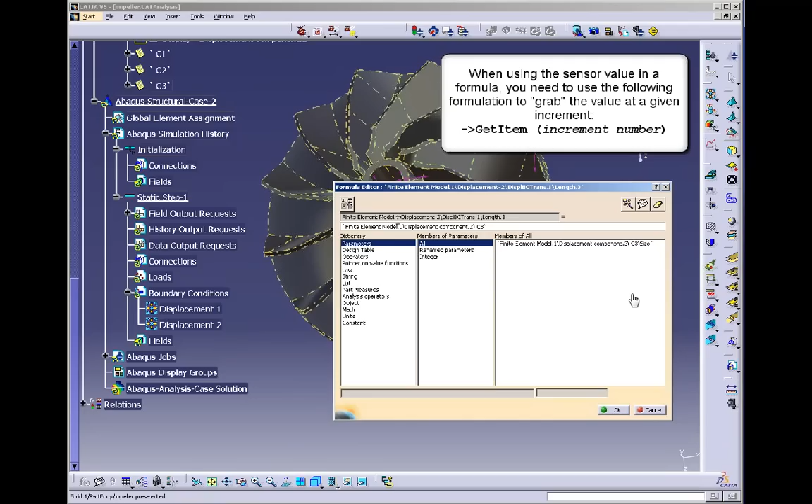Okay, we always try and use copy and paste where we can. And there we go, so we've added the displacements. And you can see they're controlled using parameters now, so we can't manually go and modify them.

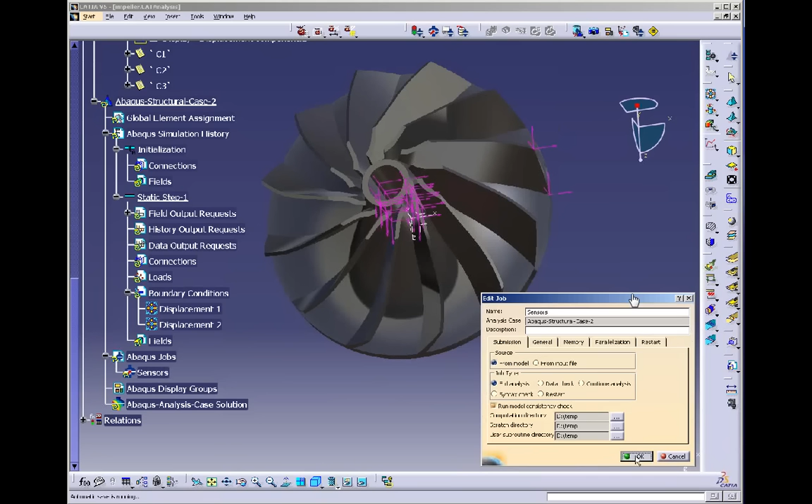Okay, so now if we run that Abaqus job, again, we can rename a job as we like, because it's a good idea to rename them if you're running multiple jobs in parallel. Okay, solve that job, so in this case submit. And here are our results.

Okay, so our translational and rotational displacement. So we can animate that through time. It's a nonlinear analysis. See how that updates.

Okay, another instance of using Abaqus for CATIA. So this is basically a thermal analysis on a brake disc. All we're basically doing, we've got a brake disc. We're going to assume it's clamped at the center, and we're assuming it's subjected to heat through friction when the pads clamp onto the faces. So we're basically creating a surface heat flux.

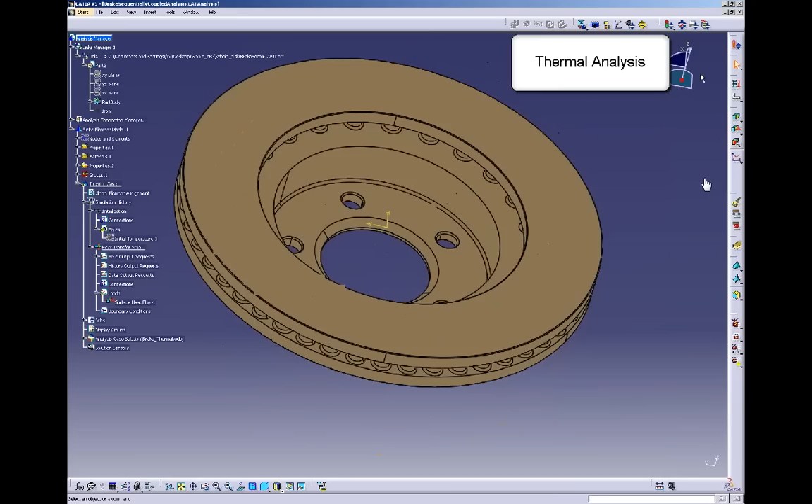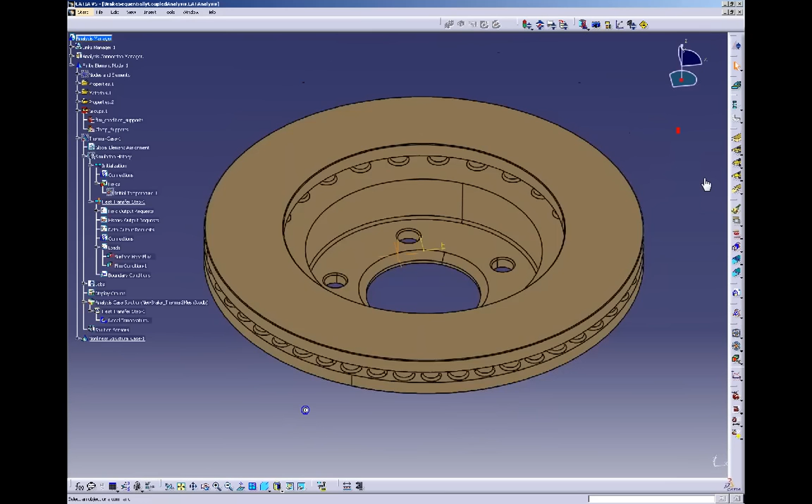Then, again, we've defined the material conductivity and thermal loads. And then run the analysis. So you can see over time how the heat changes within the actual model itself. You just clamp everything.

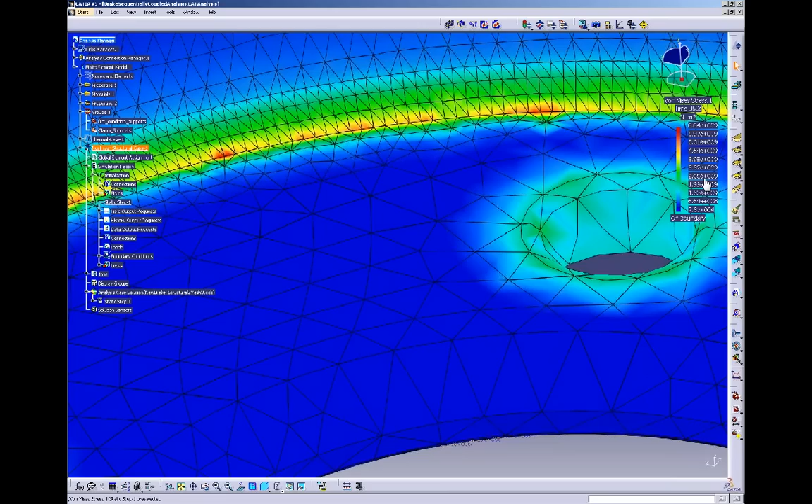There we go. Then we could feed that back into another analysis to get the von Mises stress. So we can take heat and then see how that impacts the model itself. Okay, so at this point, I'll pass it back to my colleague Alday, who will take you through what there is for you guys past CATIA V5. Alday? Okay, thanks, Amit.

Okay, as Amit explained, the final part basically is for high-end analysis. It's usually more suitable for the analyst than the design engineer. Although there is some overlap as well. Some design engineers tend to do some challenging stuff, and so they want to do a bit more of what Abaqus for CATIA can offer.

As you can imagine, Abaqus for CATIA is basically CATIA plugged into Abaqus or vice versa, which means there are a lot of automation tools set up for that, which means not all Abaqus functionality is going to be available to CATIA users. Therefore, the Abaqus option with the CATIA associative interface is always there for people who want extra flexibility to do additional analysis.

And now additional analysis, we will go through that in a minute, but you're talking about things like coupling between analysis, CFD, and so on. So basically, what is beyond Abaqus for CATIA? Why would anybody use Abaqus? It's basically, as I said, the flexibility.

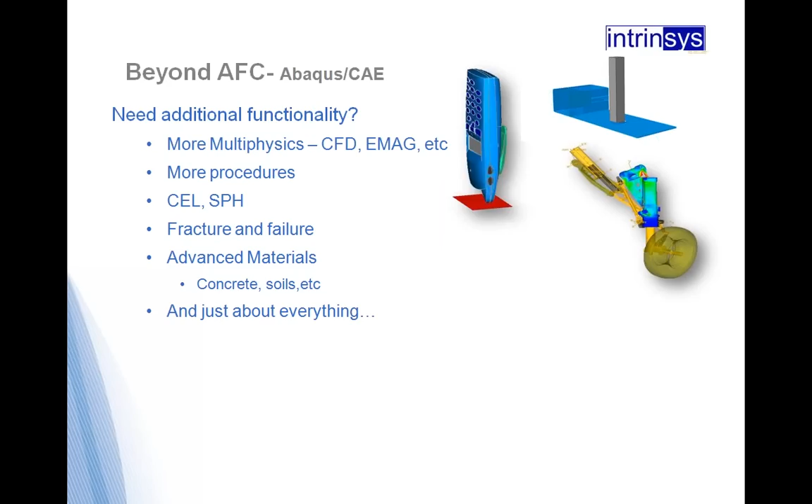And if you want to deal with, for example, advanced material properties such as concrete, soil, and all these complicated materials that don't behave like steel and so on. And more or less anything extra that's not available you can do with Abaqus. If you need additional tools, for example, if you want to do advanced fatigue durability analysis, there is FE-SAFE available within the Abaqus portfolio.

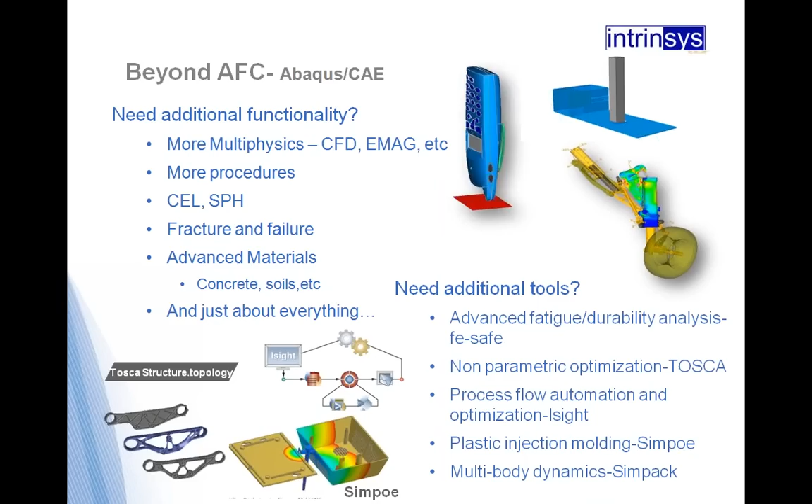If you want to do non-parametric optimization using Tosca, that's actually structural and fluid optimization. If you want to do process flow automation and optimization, Isight is an excellent tool for that. Or if you want to do plastic injection molding, there is an additional tool available to allow you to do that kind of analysis, as well as multi-body dynamics using the SIMPACK product.

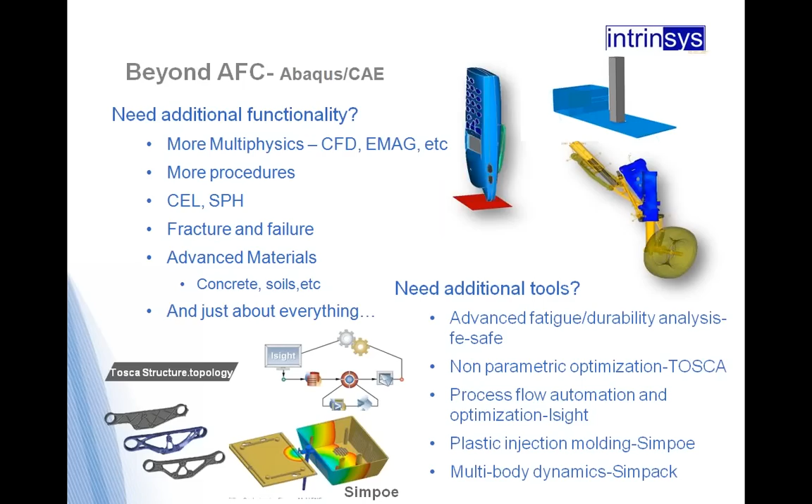So you can see, basically it's scalable, whichever option you want to use, whatever your role as an engineer, and so on. Then you can use the right tool for it. Okay. I think at this stage we are ready to go to our final part of the webinar, which is the 3DEXPERIENCE platform. A lot of people wonder what it is. It's basically the latest development from Dassault Systèmes.

So what is the 3DEXPERIENCE platform? It's basically a platform that allows you to provide software solutions for every organization or department in your company, from marketing to sales to engineering, all from within one single user interface. So it's basically a single easy to use interface. It powers 3D design, analysis, simulation, and intelligent software in a collaborative interactive environment.

This platform is available on premise, public or private clouds, which has never been available in the past. So it's really exciting for a lot of people who want to get into that field. You probably heard about it before, but the user will have access to what we call the compass. It's very famous nowadays. Basically, the compass allows you to run more or less everything from within it.